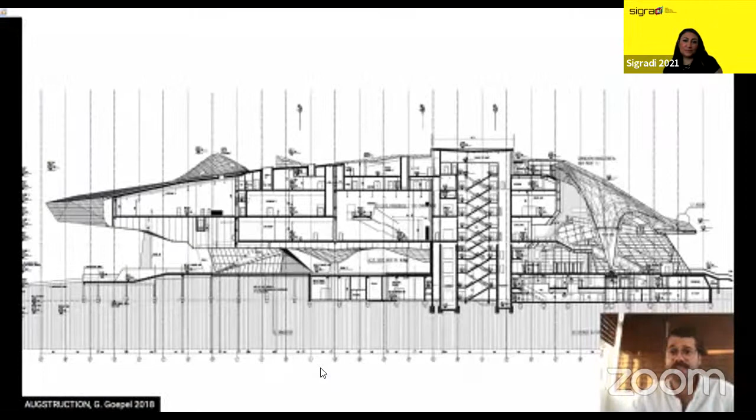We are entering a new phase of AR, where the focus is shifting from a representation tool that displays general content on markers to a phase where mixed reality will be personalized, adapting and interacting with our surroundings and ourselves to create experiences that enhance our reality. AR holographic instructions in architectural design and construction context have the potential to produce an alternative to conventional 2D drawing practices by implementing it as an aid for assembly and fabrication tasks.

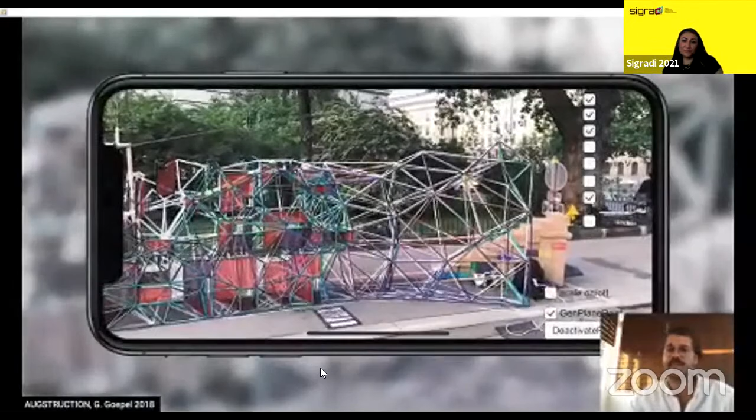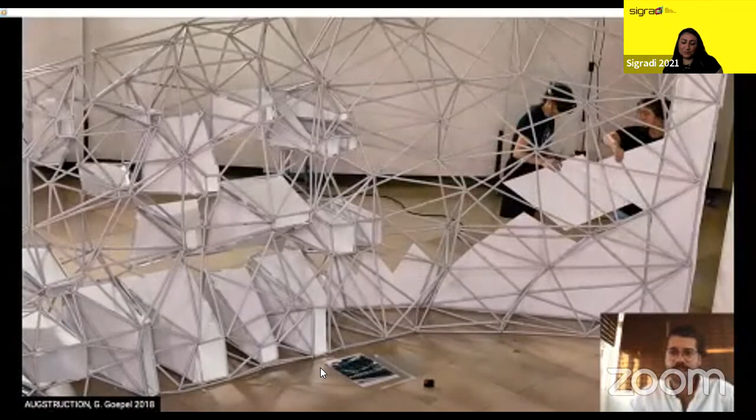The on-site need for human labor skill is increasingly reduced to the basic assembly of advanced kits of parts, pre-manufactured by automated processes. AR enhances human on-site agency and increases labor forces' capacities to participate in complex building processes. The project's main ambition is to identify and expand on the spatial design opportunities and construction-related impacts from augmented and mixed reality technologies integration into the architectural design and design implementation. More specifically, the aim is to reflect and develop on practical challenges and the implementation of AR 3D holographic instructions on assembly and fabrication in an architectural context, to develop a best practice guidance for AR manuals.

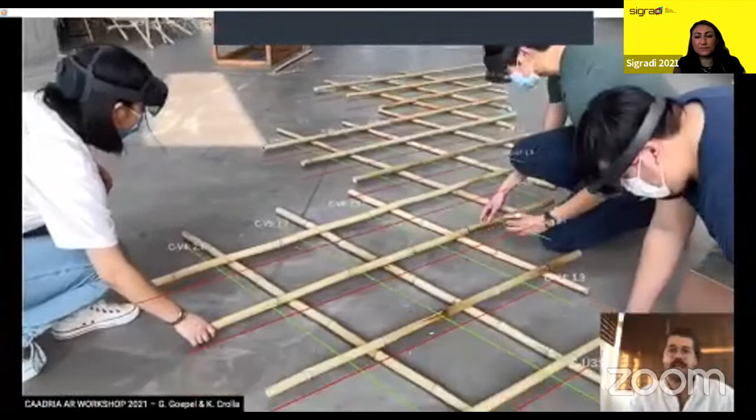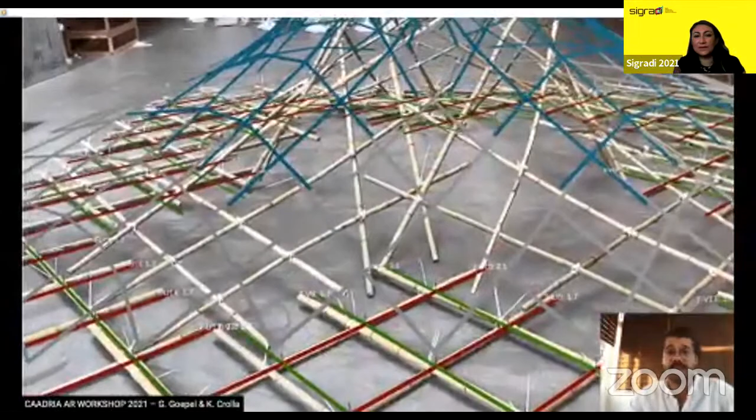This PhD study hypothesizes that AR 3D holographic instructions for assembly and fabrication will become far more effective than, for example, robotics or other forms of CNC production. This is because AR enables augmentation of on-site skill through the direct visual overlay of specific holographic instructions onto manual actions. This can have a substantial impact on vernacular architecture in regions and projects that involve untrained community members in the construction phases, as augmented reality applications have the potential to increase limited affordances on-site for complex solution spaces by making computational design tools more accessible.

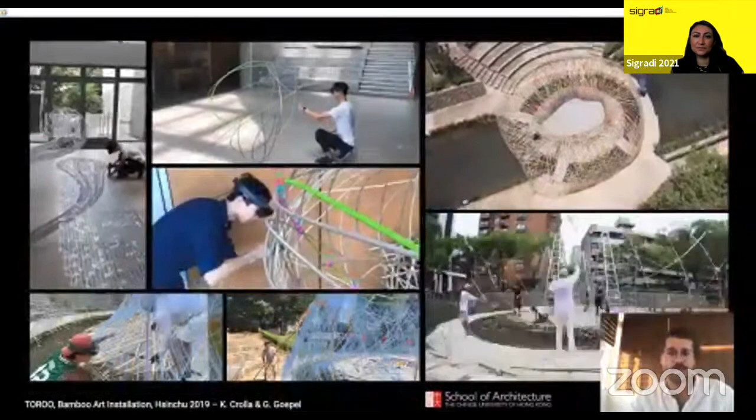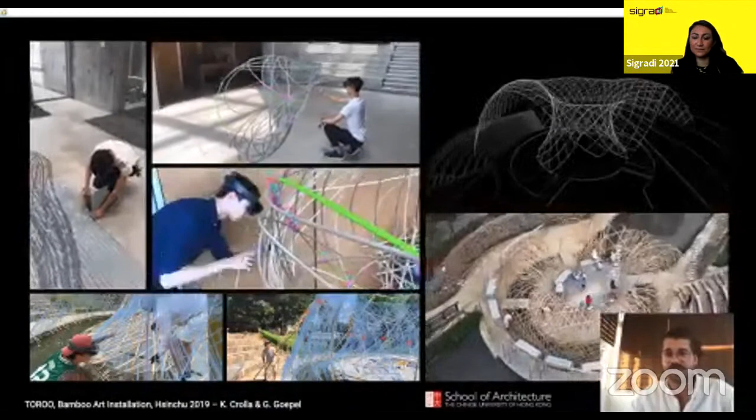The employed methodologies are reflective practice applied on a variety of case study prototypes that investigate the implementation of holographic overlays to augment assembly, fabrication, and design processes. The study will compare several approaches for holographic aided processes by looking at a variety of AR techniques for assembly, fabrication, and design tasks. It will examine emerging technologies in the field of extended reality technologies, hardware and software capabilities to fulfill the requirements for seamless integration into the field of architecture.

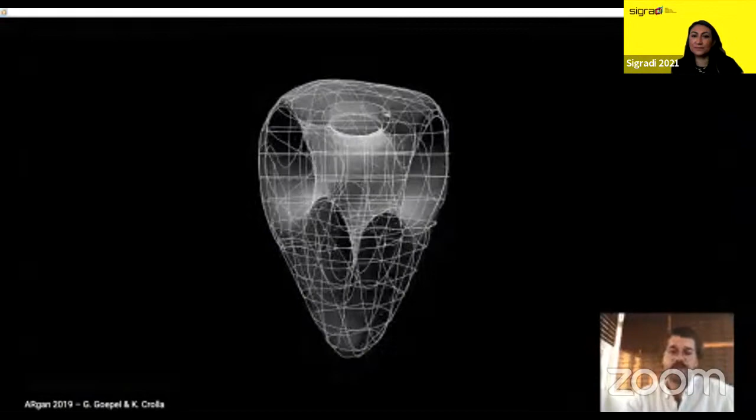In addition, it will advance studies in collaborative, holographic-driven construction, expand opportunities for technology-infused craftsmanship, and reflect on workflows that replace conventional paper drawing-based communication with holographic instructions. The hypothesis this research project postulates and aspires to prove through the work discussed is to expand the locally available design solution space for AR 3D holographic instructions for assembly and fabrication.

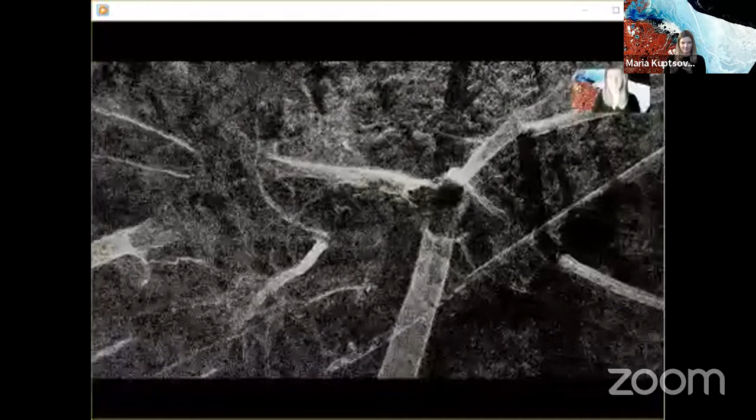Today, the Earth and the cosmos have been transformed into a gigantic technological system. The concept of nature has changed, evolving its meaning from a romantic garden of Eden to a cybergonic form of living, understood as a natural-technical continuum. Non-human agencies such as machine algorithms, transgenic plants, and planetary viruses are equal actors within the hybrid reality we live in. The technosphere is included in ecological thinking.

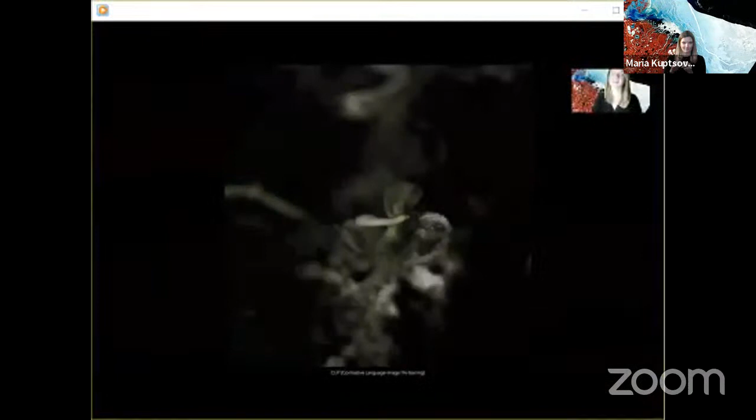Technology embedded in multiple objects within the landscape allows new regimes and metabolisms to evolve. Through sensors and intelligent technologies, we are decoding the complexity of flows, behaviors, and patterns embedded within the landscape. We see a strong potential for an explosion of new design methods, taking form through synthetic biology and artificial intelligence. However, contemporary design computation is still centered around the human and structured by our prejudice.

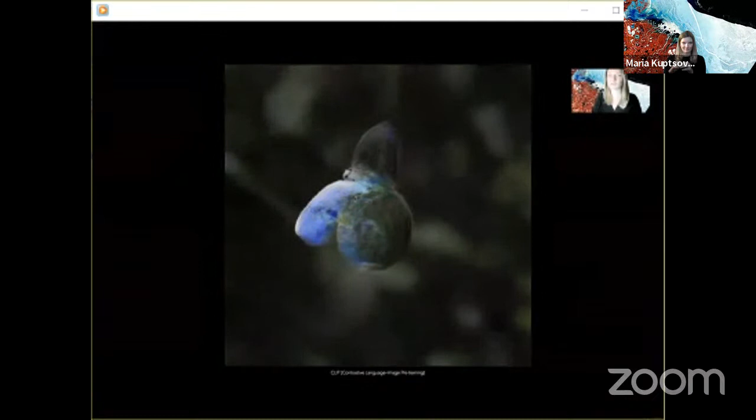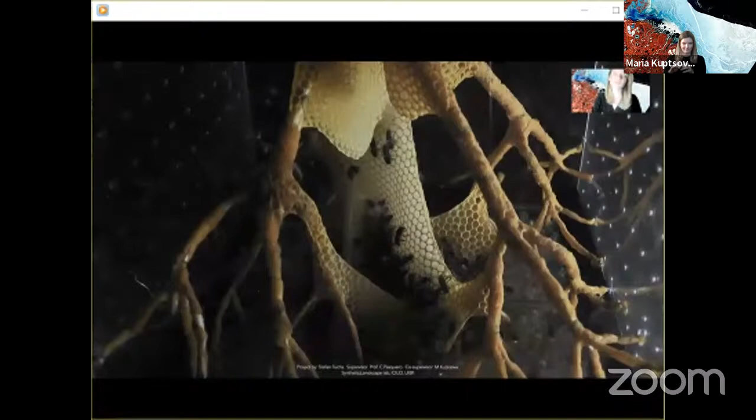Can we develop a design technique that could shape a new form of communication between human and non-human, replacing the anthropocentric approach with the design of cybergonic living systems? Biological organisms operate with their own biases and modes of reasoning. The behavioral model of fungi, bacteria, insects, and animals can be understood as a form of intelligence which acts within a realm alien to us.

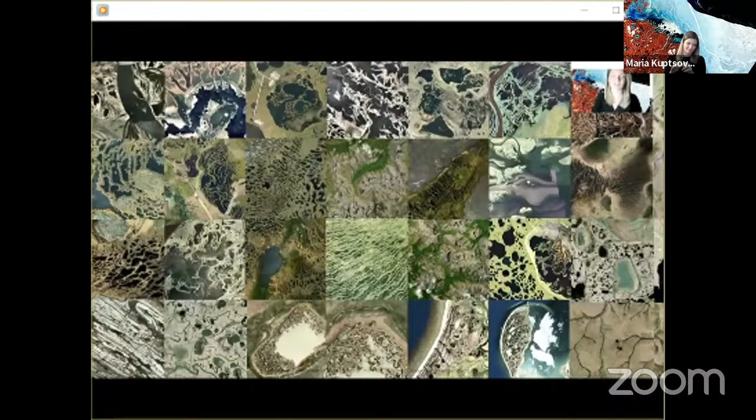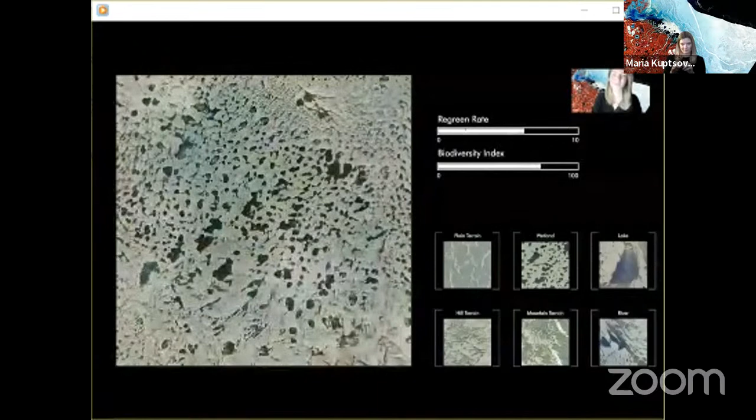The stratum of the landscape encodes and stores knowledge about microclimates, microchemical compositions, and multi-species interactions. Machinic intelligence has capacities to search, generate, and process information with an efficiency not comparable with human capacities. We could consider machine learning as an instrument of knowledge magnification that helps to perceive features, patterns, and correlations through vast spaces of data beyond human reach.

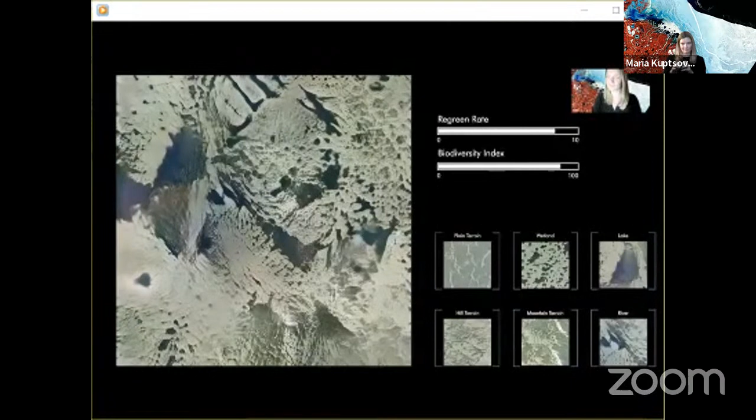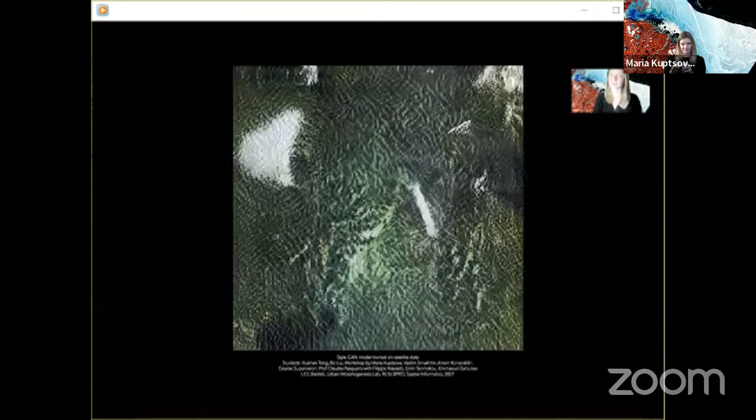What if the intelligence of an organic system could become an input to a technological system with its own evolutionary algorithm? In this case, biological models could frame new biases for machinic operations. The conversation between biological and technological systems would frame a meta-language, which can be considered a synthetic form of intelligence.

In order to propose a biodigital design system, my research is focused on a timber structure. Traditionally, architectural material has been classified as either structural or functional. In a natural system, it is difficult to differentiate between structural and functional materials. Biological matter is heterogeneous and informed through the direct relationship with the environment.

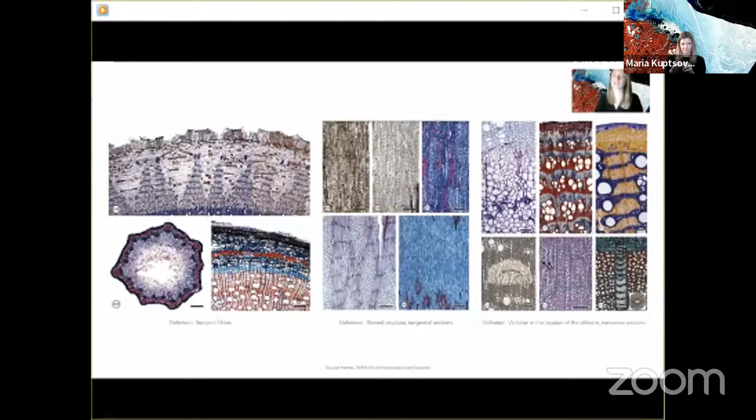Wood is widely used in architectural construction because of its mechanical, environmental, acoustic, elastic, hygroscopic, thermal, and aesthetic properties. However, the heterogeneous properties possessed by wood in its living state are usually considered to be rather problematic. To study the material organization of wood, the project uses a large database on the botanical characteristics of different wood species developed by the InsideWood project.

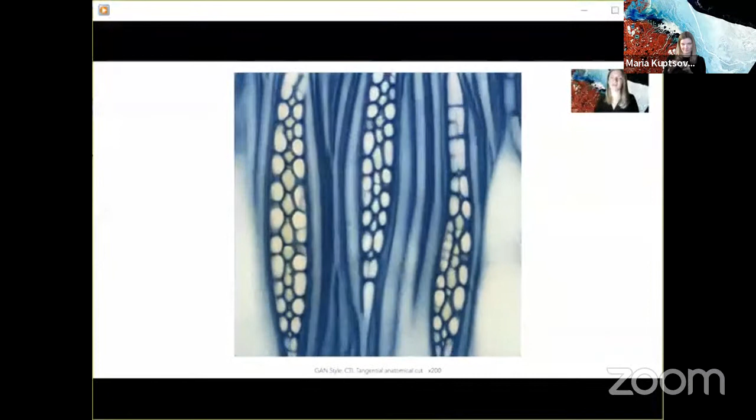Microimages of about 1,000 species were collected and analyzed with different contrasting techniques in 3 anatomical cuts and in 3 different magnifications. The distribution of vessels and fibers indicates varied degrees of densities and porosities, as well as reveals the heterogeneous anisotropic properties of wood. These qualities, which are usually considered as a negative side effect, can be rethought and reused in a design of

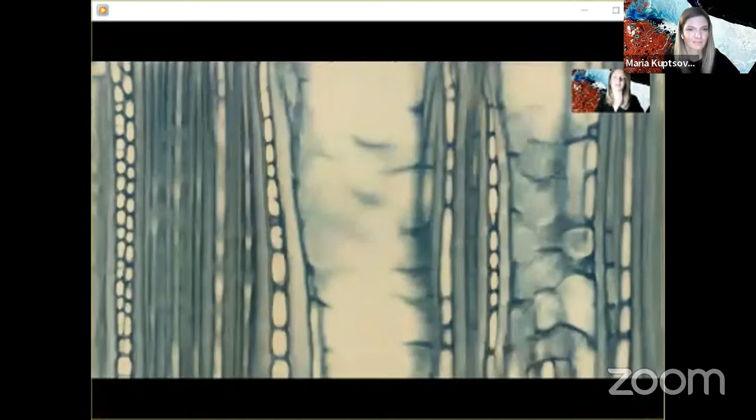artificially alive systems. The research proposes the use of generative adversarial networks as a method for extracting these material organizational principles from an existing database of timber structure. The StyleGAN2 variant of GAN was chosen as the most studied in architecture. During the training process, GAN architecture forms a latent space, which can be imagined as a space of network's knowledge. A series of points can be created on a linear path between 2 points in the latent space to set up a latent vector.

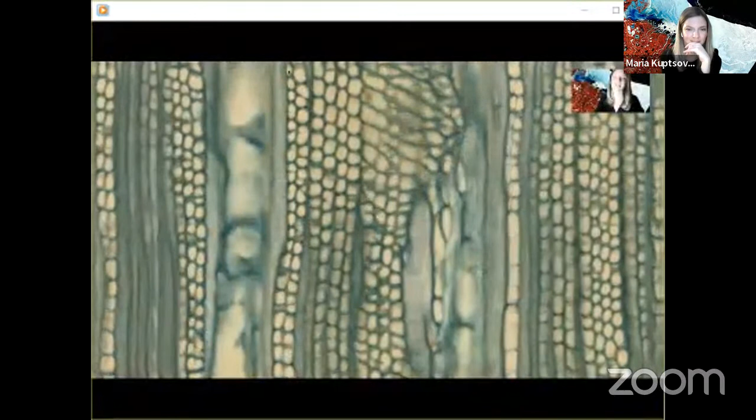To visualize the internal and external morphology, the latent vector interpolation was translated into the z-axis of a volumetric structure. In this process, the basic geometrical data describing the anatomical properties of a timber structure were extracted. This network of curves and surfaces describes the distribution of material as a behavioral pattern. A volumetric model is formed based on point cloud data generated from transverse timber structure cuts.

Fabrication technologies, such as additive manufacturing, allow for the development of adaptive fabrication methods informed by research in material behavior. Wood-based filament is used as a 3D printing material, suggesting a new regenerative life cycle of matter from the wood in its living state to recycled wooden material. Material studies provide a new insight on how additive manufacturing can be used to develop novel approaches for timber construction.

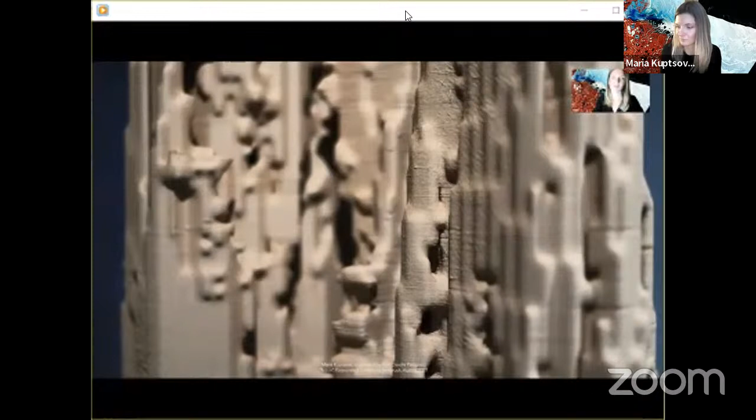The use of a large-scale industrial 3D printer, WASP, allows the material experimentation at a larger scale. However, in the next steps, a multi-scalar robotic system will be implemented as a fabrication method. This would make digital fabrication techniques available at even larger scale, as well as set up a direct relationship of the fabrication methods with environmental conditions.

Additive manufacturing, regenerative life cycle of matter, as well as introduction of machine learning-based design technique, suggest scenarios where cyberganic wooden structure could be artificially grown by the means of intelligent technologies. It challenges the process of growth, decay, and ontogenesis, introducing a form of cyberganic living object, which becomes a part of synthetic landscape choreography. This project aims at establishing a design strategy which places biological intelligence at its basis, as well as points to the ability of reshaping the human-centered approach in design computation.

Thank you. Right. Thank you, Maria. Great presentation. So how about we rotate and start with Kathy? You would like to start? Sure, thanks.

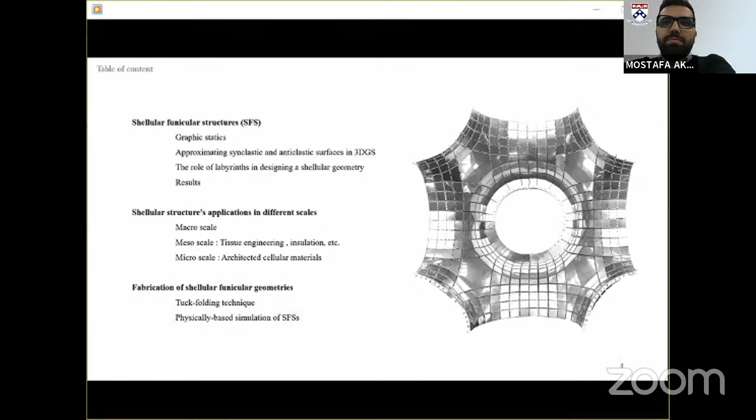Hello, this is Mostafa Akbari. I'm a PhD student in architectural technology at Polyhedral Structures Lab at the University of Pennsylvania, Weitzman School of Design. My thesis is named Shellular Funicular Structures. This research is divided into 3 sections. First, I introduce a novel technique to design single-layer shell-based spatial structures using graphic statics. Then I mention the application of this technique at different scales. And finally, I introduce a fabrication method that I'm currently exploring.

Graphic statics as a geometrical form-finding method describes the equilibrium of a structure using visual geometric relations. With this technique, we can design axially loaded structures in which no bending occurs. This technique is based on a clear relation between form and forces in the system. In this technique, the equilibrium of a node in 2D, which is named form diagram, can be represented by a closed polygon named force diagram. In 3D, a closed polyhedron can represent the equilibrium of a 3-dimensional node as 3D reciprocal diagrams.

3D graphic statics is an extension of 2D graphic statics in which we can design a variety of cellular structures for defined boundary conditions. But structural performance of these structures relies heavily on the buckling performance of linear elements. Also, fabrication of the nodes of these structures is quite challenging. The question here is whether it is possible to convert truss-like cellular structures designed in 3D graphic statics to smooth surface-based structures.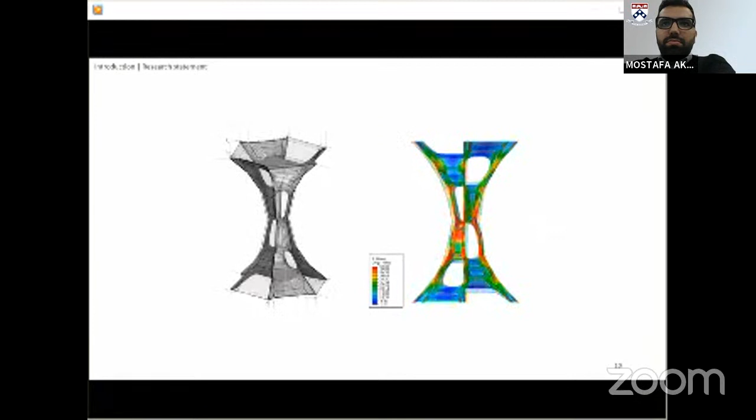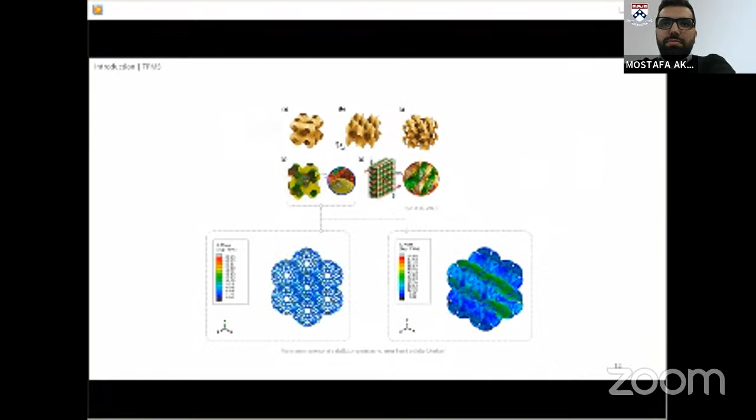Triply periodic structures with the geometry of minimal surfaces called shellulars have exhibited great structural performance due to their specific geometric properties, specifically compared to their strut-based counterparts. A typical example of the geometry of shellular structures are triply periodic minimal surfaces as two-manifold single-layer surfaces with zero mean curvature and negative Gaussian curvature. Shellular funicular structures can approximate the geometry of shellulars using a novel technique in 3D graphic statics.

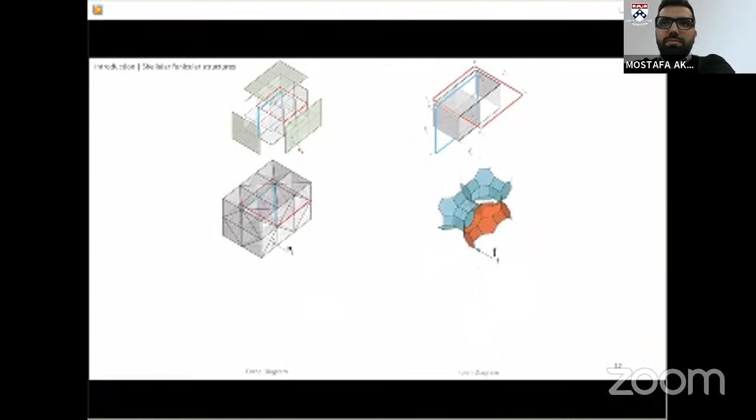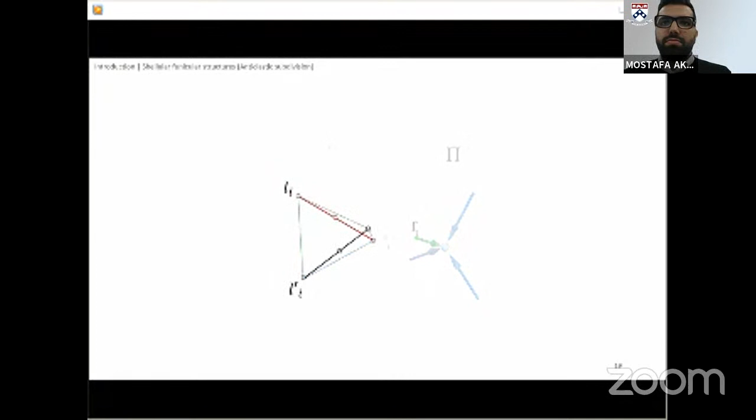In this technique, after removing extra faces in the form diagram, we result in a two-manifold discrete surface. By removing these faces, the surface divides the space into two subspaces, each of which is connected with a labyrinth. Applying the anticlastic subdivision to each set of skew labyrinths results in a smoother version of the form diagram. In this subdivision, a tetrahedron is produced between each set of skew labyrinths as a force diagram corresponding to an anticlastic node as a form diagram. These labyrinths can be used as a subdivision axis to subdivide the main polyhedron into a group of tetrahedrons corresponding to a discrete anticlastic surface as a form diagram.

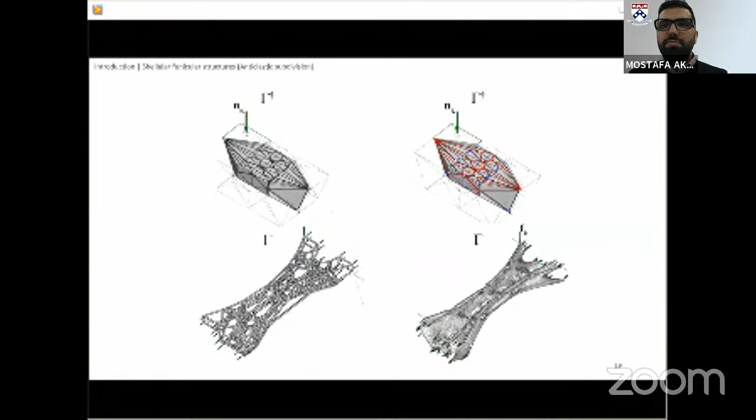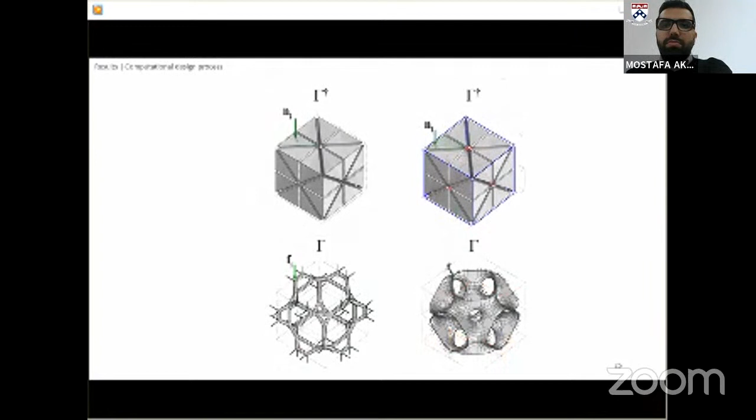But in more complex situations, finding the labyrinth network intuitively in the force diagram is not an easy task. That's why an algorithm was developed to automatically translate the truss-based cellular structure designed in the context of 3D graphic statics to a shellular funicular structure. The algorithm starts with tetrahedralizing the force diagram to make sure that the form diagram only consists of 4-valency nodes. Next, it finds the labyrinth graph in the force diagram, and then it removes the corresponding faces in the form diagram to result in a two-manifold geometry. Finally, the algorithm generates a smooth curved surface from the discrete surface using a smoothing algorithm like Catmull-Clark or anticlastic subdivision in the context of graphic statics. Using this technique, one can design a cellular funicular structure for a defined boundary condition and translate it to its counterpart, a shellular funicular structure.

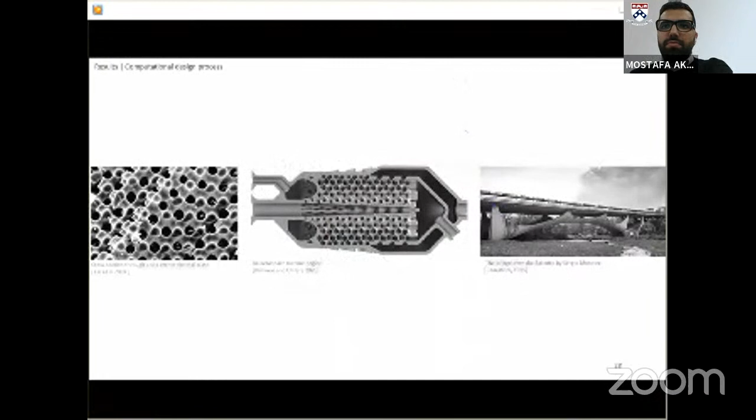This technique can have a variety of applications from microscale to macroscale. For example, the method has been used to design and analyze the mechanical performance of shellular materials designed in the context of graphic statics. Using this technique, a shellular material with Schwarz P surface as the geometry of its unit cells was designed.

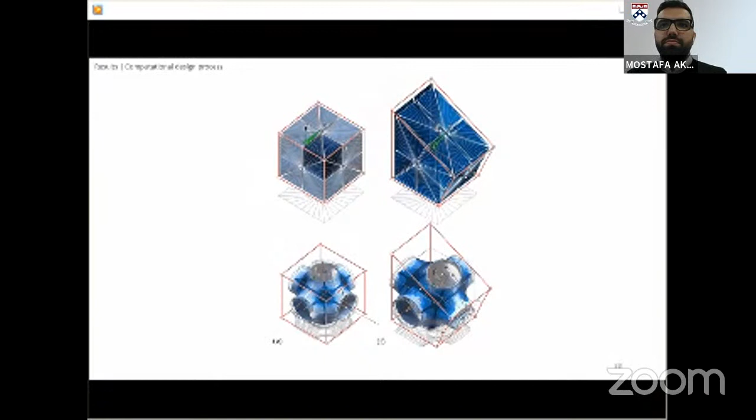One of the advantages of using this technique to design cellular architecture is in controlling the resolution of the geometry. In fact, by applying different levels of subdivision to the same set of labyrinths, we can control the resolution of the geometry from truss cellular version to shell cellular version. Also, by deforming the geometry of the labyrinths, we result in a new architecture in equilibrium for a new boundary condition. And finally, by designing new sets of labyrinths, we can design unprecedented cellular funicular unit cells, and also control the resolution from truss-based cellular to cellular version.

Comparing properties of p-cellular architectures created by this method and the ones based on the trigonometric level set equation, we observe that their mechanical properties actually match well, and increasing the level of subdivision will result in stiffer materials. In addition to microscale, this technique has application in mesoscale or macroscale.

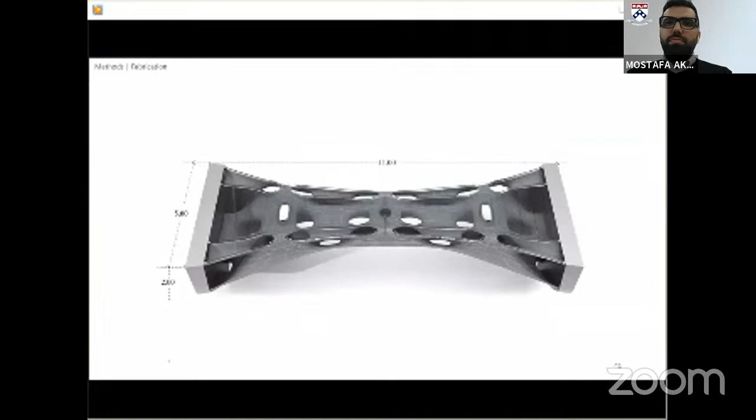But the question here is how we can fabricate these kinds of structures in large scales. Fortunately, these structures already comprise planar faces resembling a polyhedral surface. Therefore, they are a genuine candidate to be fabricated using origami techniques from a flat sheet of material.

We were inspired by a technique named tuck folding. With this technique, one can obtain the folding pattern of a polyhedral surface out of a flat sheet of material with hidden tucks. In this technique, after mapping the faces of the polyhedral surface, instead of each edge and vertex in the folded state of the geometry, a gap named a tucking molecule is inserted, which is actually responsible for determining the geometry of the surface at that point.

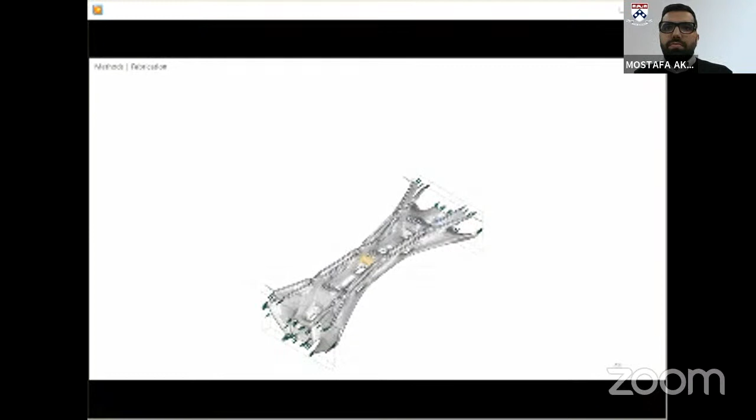At the end, these tucking molecules will be folded to be completely hidden behind the surface. We use this technique to fabricate the section of one of the design specimens. This geometry consists of saddle-shaped patches.

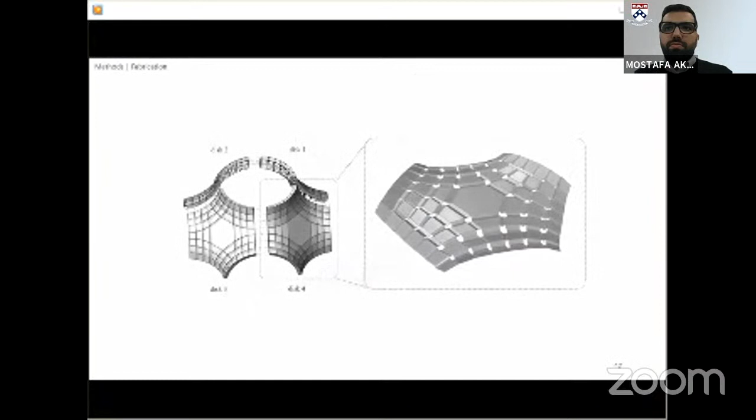After generating the folding pattern of these patches, each patch was folded manually and attached to the others to result in the final geometry. Although using this process one can fabricate a discrete cellular structure out of a flat sheet of material, the folding process of the tucks is labor-intensive and also time-consuming.

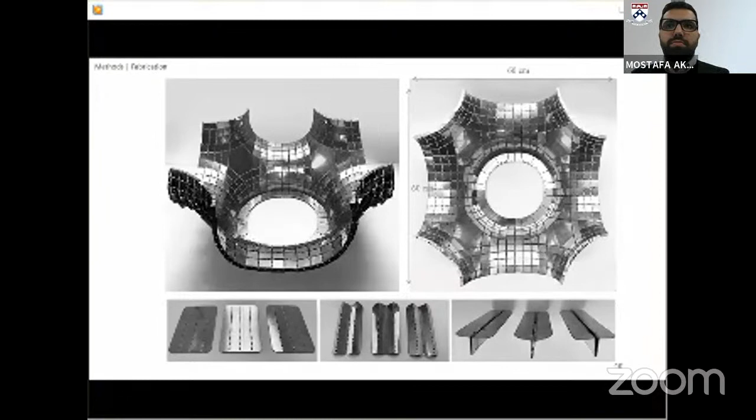That's why for materializing this process, we are investigating a self-folding origami technique. In this technique, we can use a physically based simulation to simulate the folding process of a basic bending element from an undeformed to deformed version by calculating the total forces in the system and computing acceleration, velocities, and new positions of the mesh's vertices in the deformed state.

Here is the simulation of the basic bending element along with the visualization of elastic bending forces in each vertex, and the graph on top actually shows the magnitude of the total forces in the system, showing the system is in equilibrium at the end.

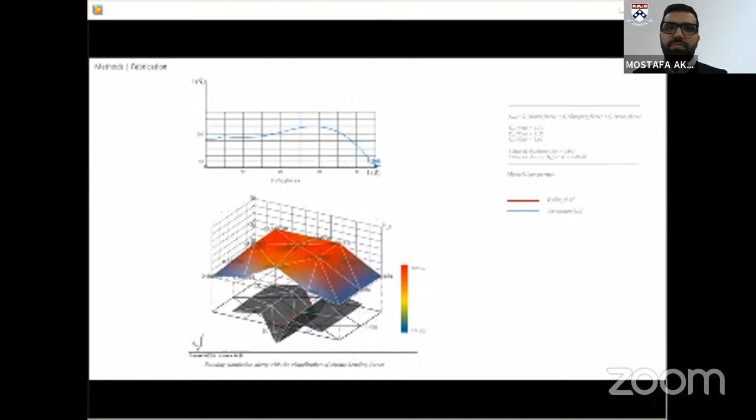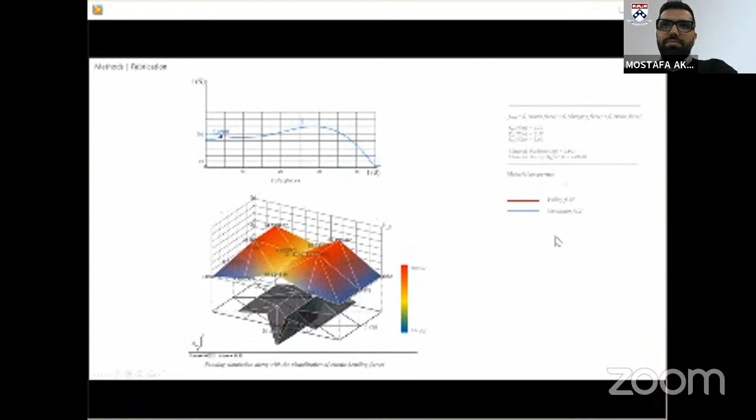In this simulation, we can control the magnitude of different properties such as stiffness, material thickness, and density. By knowing the magnitude of forces in the system and the material's properties, we are able to materialize the folding using an active material such as wood or any shape memory alloy in the real world, to construct a discrete cellular funicular structure. This is still an ongoing research, and currently I'm working on the simulation and materialization of the folds. So this is still continuing. Thank you for your attention.

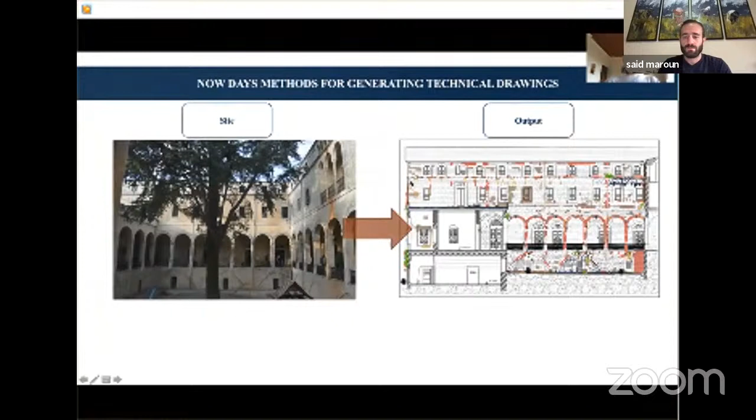Nowadays, methods for generating technical drawings from the existing site, as we can see here, an elevation of the inner court of Mayfouq Monastery. The output is generated manually, transferring these images to a drawing by hand or using the computer with Autodesk software such as AutoCAD and Revit.

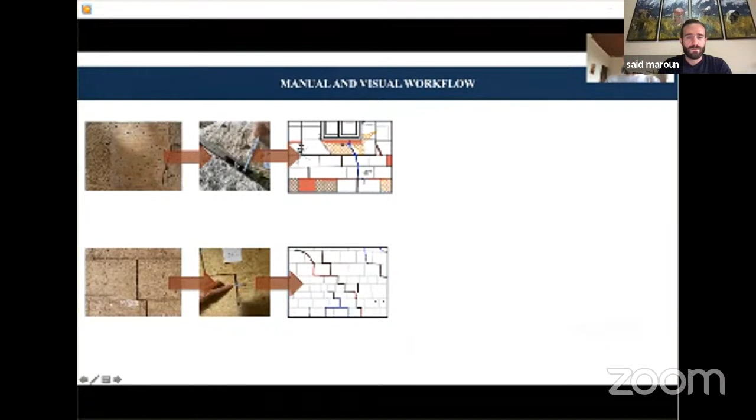All of the work is done manually and visually, or even by images, and the dimensions on site written on papers, some transplanted from images. We can see here a process of transforming the drawing from images to drawing, and even with all precision and care, the drawings won't be exactly the same as they exist on site, and the specs are based on the knowledge of the architect restorer, creating a problem of repeating all over again.

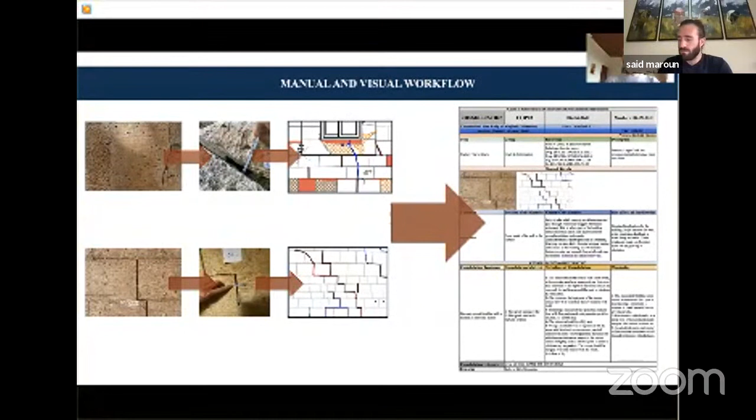The documentation problem and generating drawings with today's techniques are all related to human fallibility, time consumption, limitation of tools, and manpower, where in many critical places there is no time. As an example, the explosion in Beirut, where until now many teams of architects and restorers are still working today to generate and assess the damages, and that costs us losing materials because of environmental issues like rain, sun, and dust.

Wouldn't it be just perfect if the computer worked together with human knowledge to establish precise and well-organized work within a short period of time.